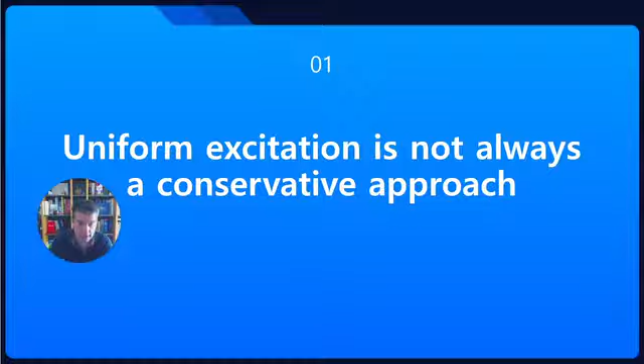Let us start by questioning a fundamental assumption that most of us make in design. There's a wide perception that uniform excitation is always conservative, so if we forget about the spatially variable nature of ground motion across an extended structure, it's going to be fine. This is not necessarily true, as you'll see in this brief webinar, and if it's not true, it means we need to do something. So the first thing we'd like to challenge is whether the common assumption that all support points in your finite element model will be excited with exactly the same time history is conservative or not.

Let's start with the definition that Eurocode 8 gives in the current version, not the new generation, the standard one. Spatial variability is defined as the situation where ground motion at different points differs, and therefore the seismic action cannot be based on the characterization of motion at a single point, typically applied in an identical manner across all support points. So the code recognizes that ground motion is not the same.

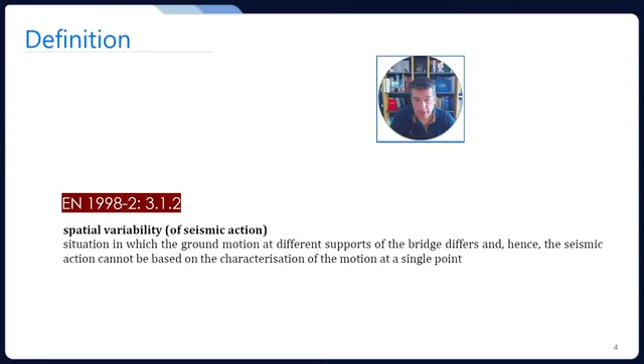If you consider any long structure, a bridge, a buried pipeline, an above ground pipeline, anything extending above 100 meters or so, take this example: there is absolutely no reason for ground motion to be the same from the support of one pylon compared to the support of another pylon. Why? First of all, because waves travel, and as they travel, many things happen.

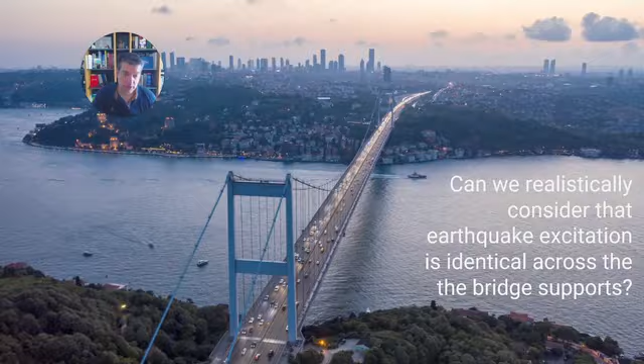Can we realistically consider that earthquake ground motion is just a single text file, identical at all support points? Sometimes in probabilistic assessment we use a bunch of motions, maybe 100 ground motions, and say we've accounted for the uncertainty in the earthquake input. Well, yes, in terms of amplitude, frequency content, duration, and other selection criteria. But we have not accounted at all for the fact that as waves travel across a structure, they do change. This is the very topic we're discussing today.

It's easy to comprehend that waves travel, as you see in this visualization. So at minimum, even if the ground motion were the same, there would be some phase difference, some time delay, before the waves arrive from one point to another. Is this related to the speed of traveling of the waves? Yes, of course—but be careful, not the shear wave velocity, because we're not talking about vertically propagating shear waves right now.

If we have a bedrock and all waves simply travel from the bedrock vertically upwards to the free field, then there would be no phase difference. They would arrive at exactly the same point. But because waves travel at an angle, this means that they have an apparent velocity, which is different than the Vs velocity. It's much larger, yes, but it's definitely different. And therefore, they would arrive at different points at different times.

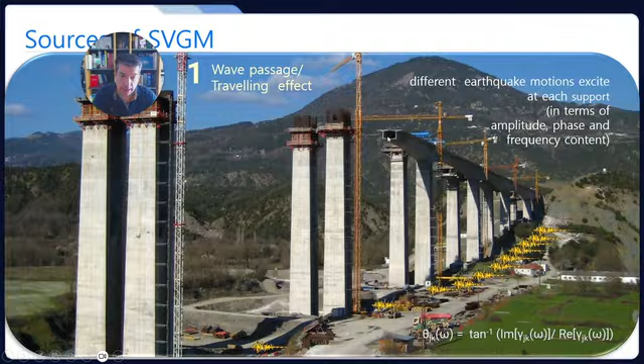So due to wave travel, ground motions not only arrive at a delay, they are different. And because they are different, their coherency drops with frequency and with distance. So the longer two points are apart, the less correlated they are. This is something easy to understand. And the higher the frequency they carry, the quicker the drop of this correlation, which is called coherency.

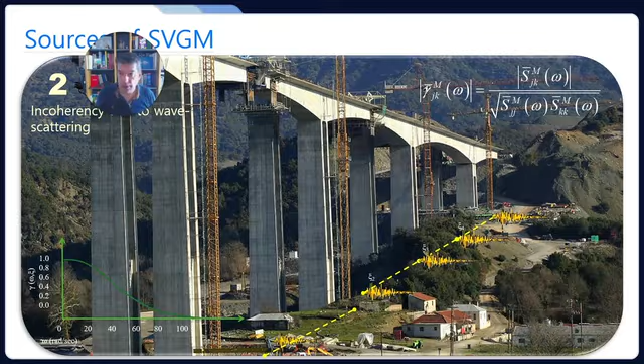This is a general rule, and this rule has been verified in various strong motion arrays across the world, in Taiwan, in Japan, in the West Coast, and in Europe. And that's exactly why different scientists are plotting, like you can see here in this chart, for a given distance, coherency with frequency, starting from unity, which means identical signals, and gradually this coherency drops with increasing frequency. Now, which one of these equations you're going to use, that's subjective, obviously, depends on the seismotectonic environment you're in, but whatever you use, or if you use the average of them, the notion is the same.

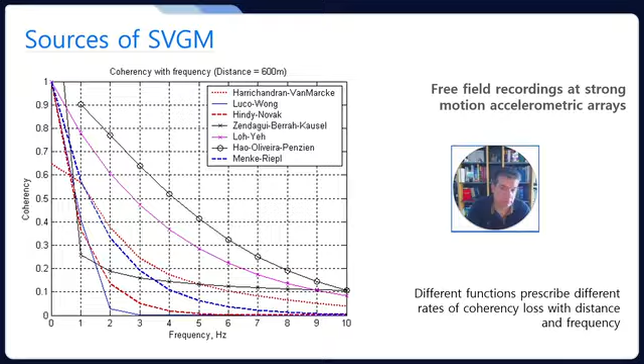Similarity, let's say correlation or coherency, drops with frequency and with distance. This is a fact. So there is no chance ground motions are the same from one point to another. Of course, the million dollar question here would be: okay, maybe points have a different excitation across a bridge, but the response will be conservative. The response of a bridge will be reduced, and the design quantities will be reduced. And if that's the case, we don't have to worry about it. And this would actually be the useless seminar of the day, because we've learned nothing and there is nothing to do about it.

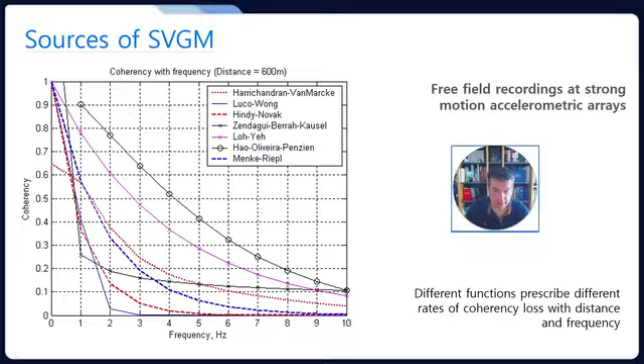So let's put some numbers so that it is more justified. For instance, consider a case where not only waves take time to propagate, not only they are reflected and refracted and changing in phase, amplitude, and frequency content, but you also have very different local soil conditions.

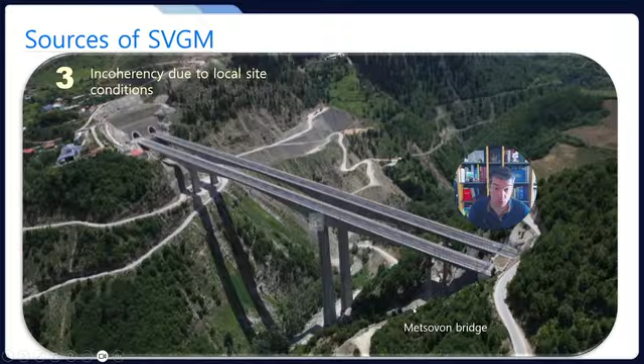That's an additional reason. It's an additional reason, because commonly in bridges that cross valleys, the soil profile is kind of rocky, or soil type A, at the abutments, and then it can become softer as you cross a valley, or even very soft and liquefiable in specific cases, which means that different points will have very different frequency contents and actually amplitudes, because if soil liquefies, there is an acceleration cutoff.

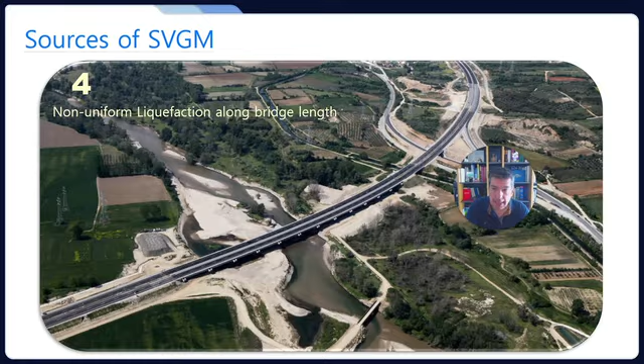So because of these four reasons, ground motions are inevitably different. The structural response will be different. I'm telling you straight off that on some occasions it's going to be increased locally or decreased locally, for reasons that we'll reveal in a while. And this is exactly where the Eurocode is trying to put things in perspective and make suggestions depending on where you're designing your bridge.

A little bit of evidence, because probably just by showing photos, I cannot convince you. Let's take a very regular, I would say even common, ordinary bridge in an area that's not even of high seismicity. This is the Warth Bridge in Austria. It is moderate seismicity in the region, and this is a bridge of 7 spans with a reasonably high length of about 400 meters.

And this is excited by two different scenarios. In one, we've got the same accelerogram at all support points, uniform excitation, synchronous excitation, as you see at the top. In the other case, we've got asynchronous excitation, which means that we did our math — we have a physics-based model for ground motion simulation.

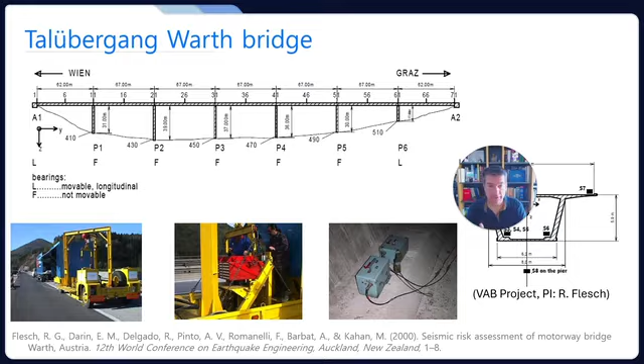We produced how many ground motions we needed here: 2 for the abutments and 6 for the piers. So we generated 8 ground motions that have time delay, local soil conditions, incoherency, and liquefaction—in this case liquefaction does not apply, but overall they're very different.

And we pick one point at the deck, we get the time history, and we plot its Fourier spectrum. You will see that under synchronous excitation, this point is vibrating at various frequencies, which correspond to several modes that are part of the dynamic properties of the bridge.

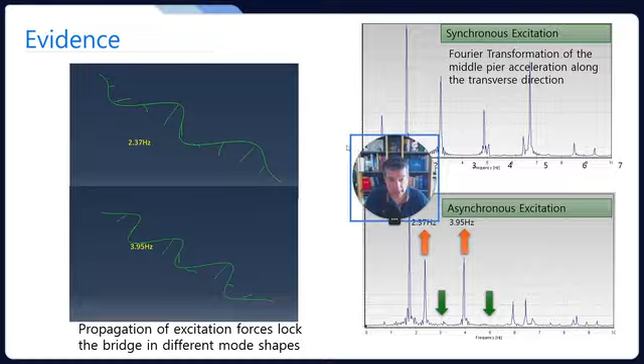But in case of asynchronous excitation, you will notice that there is one specific frequency that the structure, this point, is vibrating on during synchronous excitation. Then during asynchronous excitation, this is diminished, it's 0. And the same happens with another frequency, around 5 Hertz, 0. Whereas this point vibrates at 2 other frequencies, 2.37 and 3.95 Hertz.

If we plot the modes, these are very nice. We call them antisymmetric modes, snake-type modes, which all of a sudden have been triggered.

So, lesson learned number 1: when we excite a structure with a realistic asynchronous ground motion scenario, the structure will also vibrate on some modes whose participation factor was very small if we run analysis with a common uniform assumption. But during asynchronous excitation, they will pop up, they will wake up some frequencies, antisymmetric modes that could not be seen numerically.

And because synchronous excitation is something fictitious, it does not exist in the world, whereas asynchronous excitation exists in the world, this is very good evidence that we are missing something very important: the contribution and the excitation of antisymmetric higher modes. So that's a very hard lesson learned straight off about something that was in the shadows, suppressed, because we never had the data to run bridges for realistic measured scenarios of ground motion.

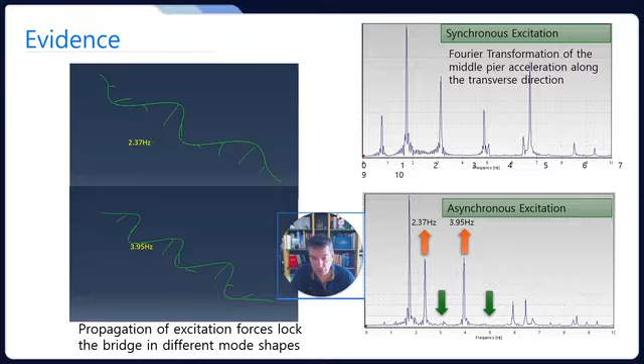And if you don't really believe me about this, let me show you this little video here. So you see the same bridge. This is the response of the bridge from the top under synchronous excitation, and the response of the bridge at the bottom under asynchronous excitation.

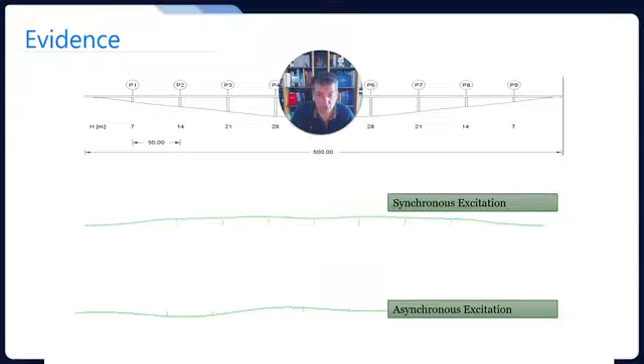You see that as time passes, under uniform excitation, the bridge tends to vibrate out of plane. Okay, that's very visible. Whereas under asynchronous excitation, the bridge aims to do a snake-type antisymmetric mode. So the frequencies that I just told you about that were revealed by a fast Fourier transformation are even visible by the naked eye. The response of the bridge out of these two scenarios is very different.

The one is what we normally do. The second one is more realistic because it is based on all the features of asynchronous excitation as we discussed. So this is fundamental. This is recognized.

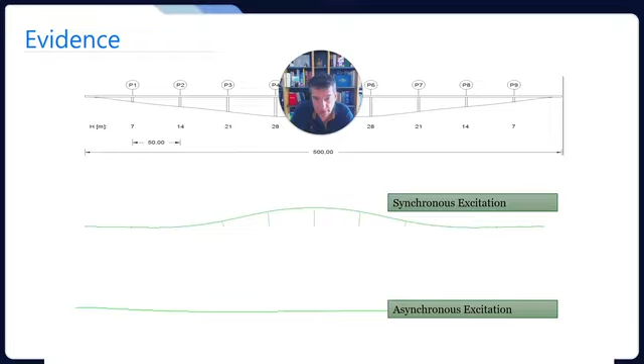You will probably ask me here, well Tassos, if this was known and if this was so important, why is this not in the codes? Well, the reason it is not in the codes is because this is a phenomenon which is quite case dependent. It is difficult to ask engineers to generate ground motions that represent all the physics of wave propagation in a complex source medium. And I think most of the codes are practically avoiding phenomena that are associated with high uncertainty because there is nothing they can actually do to reduce this uncertainty.

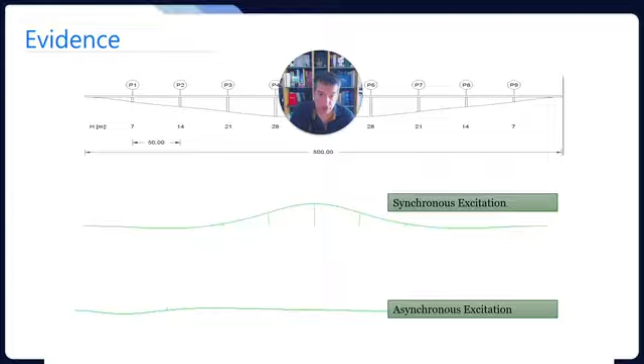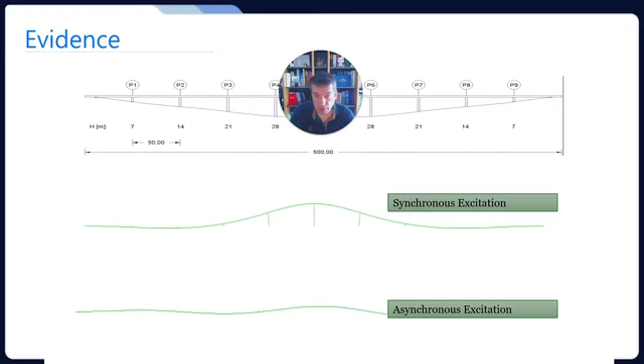And they avoid opening Pandora's box of something that will give very different results depending on your assumptions. It is so much easier simply to apply a safety factor or just close the eyes and move on. So no blame to the code—that's a complex problem. The only reason that in the new version of the Eurocode there are some specific conditions and advice on how to deal with it is because there are some concrete results about what's going on and what's the simplest way we can take it into account.

So this explains why the problem is important and why it has been neglected in previous versions of the code. Another example: Chalkida Bridge. This is connecting the island of Evia with the Greek mainland. It's a 700 meter bridge, cable stayed, with a central deck of about 400 meters. So basically we can consider two piers here.

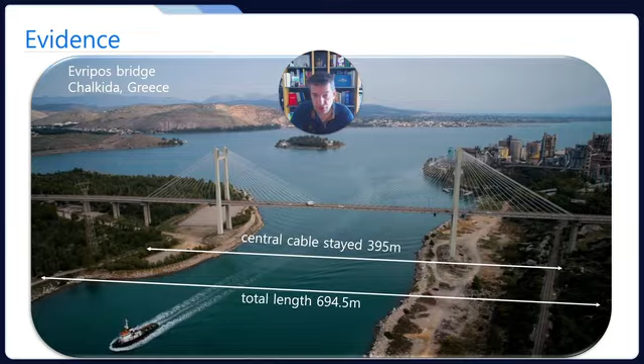This bridge is permanently instrumented. And during the 1999 earthquake in Athens, there were measurements on the bridge, at the base of the bridge, and in the near field. So what we actually now call asynchronous excitation was measured, and the bridge response under asynchronous excitation was also measured. Therefore, it was a very good exercise, which you can find in the relevant paper, to compare it with the assumption that we normally make of uniform excitation.

In this case, the asynchronous excitation is what we have practically, data from an actual earthquake through permanent instrumentation. The synchronous excitation is a numerical scenario.

We just pick one of the excitations at the abutment and apply it throughout the structure in a uniform sense. Then we select one point, for example this point at the deck, instrumented by sensor 5T. Through this point, we take the fast Fourier transform again, but plot it versus frequency and time.

This is a plot in the frequency-time space to see how this point is vibrating in time across several frequencies. In the synchronous excitation scenario, which is purely numerical, only the ground motion at the abutment is actually accurate. The assumption of synchronous excitation does not exist in practice, so this synchronous case is purely numerical.

We can see specific frequencies where the energy of vibration is concentrated, pretty much 2 Hz and 6 Hz. The asynchronous excitation scenario, which is effectively what we measured, has an extra mode. The structure is vibrating at 4.34 Hz. If we look at the modes, this is another antisymmetric mode.

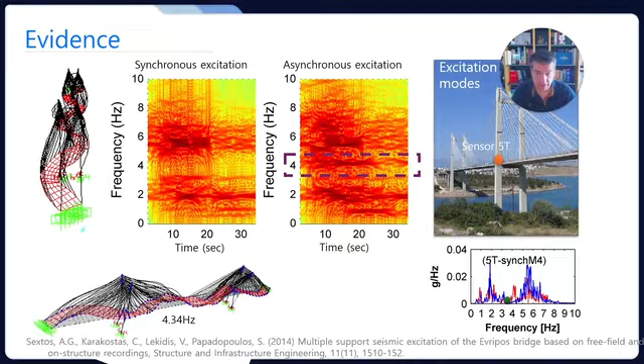So this is evidence from measured data in a real bridge under a real earthquake. And that's something the code now takes into consideration, not only as evidence but also as part of the solution. We'll come back to this in our next topic.

If you have time and would like to see an additional implication in terms of cost and loss, you will find out more, but in the interest of time, I'll just give you the quick answer about what this is all about.

If you compare the difference in the estimate of loss for a bridge under synchronous and asynchronous excitation, you will see that not only is the response very different, but the damage is very different. And because the damage is different, the repair cost is different, and the loss is different.

Therefore, the whole assessment we would do for different directions of ground motion, around 360 degrees, and different propagation patterns of asynchronism, would have a great impact on loss, particularly for bridges that have a strange shape, like this Krystallopigi bridge, which is at the border between Greece and Albania.

It's a curved bridge. It is difficult to accommodate the complex motion of asynchronous excitation, and the damage pattern, if you increase the acceleration beyond the design level, can be very, very different.

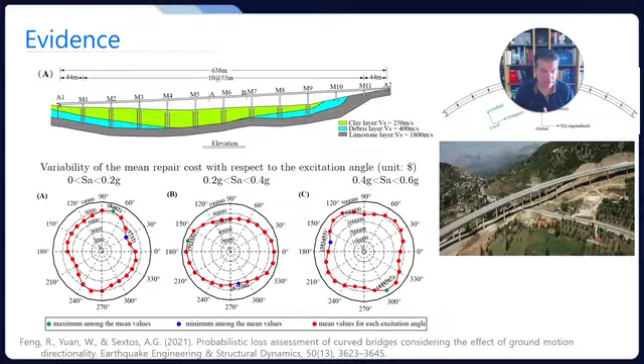So with all this evidence, I'm hoping I've convinced you at least a little bit that this is an important topic. Now let's see what the code is prescribing today, and what the new generation of the Eurocode is prescribing for the years to come.

First, let me say that the US and Japanese codes do not treat spatial variability as a problem per se. They recognize that it exists, they think it is complex, and they don't touch it. Practically, they only offer for bridge design larger seating lengths.

The idea is: probably there will be differential motion between different points, so it's better to increase the seating length of a simply supported deck if you have one. That's one way to deal with it, but obviously simply supported decks do not exist very frequently for long bridges anymore.

Therefore, if we consider that the connection is monolithic, or there is a bearing, there is some degree of connection between the deck and the pier, the more we abstract and disturb the bridge with asynchronous excitation, the more different the response will be, no matter how much we want to simplify it.

So anyway, back to the Eurocode, which is taking a good step ahead. In the current version of the code, there are good news and bad news. The good news is that it recognizes the problem exists, even in the code we're using right now, the one issued in 2005. It also offers a simplified approach, which we'll come to in a moment.

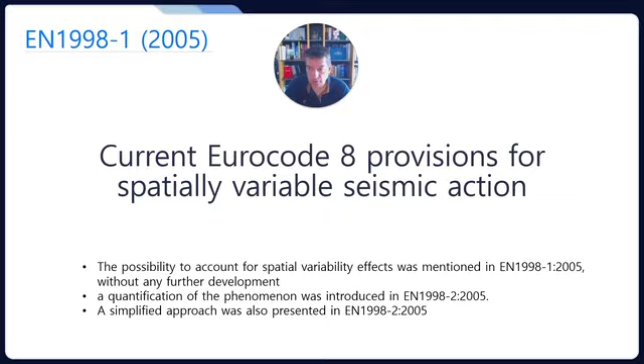You should also forget about spatial variability if your bridge rests on soils at every support that do not change by more than one category. To give the opposite example, if your bridge rests at the abutments on soil A, and the next pier is soil B, and the next pier is soil C, you've changed two soil classes, so you cannot escape it - you do have to account for spatial variability. It's a very simple rule, actually.

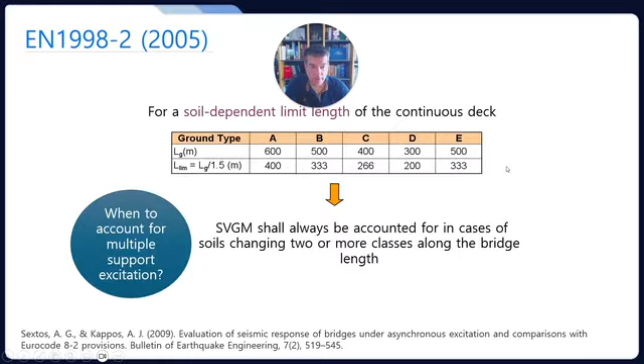And then the code goes one step further and suggests something - probably in your career you've already tried this, so I'll be preaching to the choir in a sense, but I'm sure you've found out what this actually means. For those who aren't familiar, let me explain what the current Eurocode 8 Part 2 prescribes for spatial variability.

Let's assume you've got a bridge. You run your time history analysis or response spectrum analysis in the most common scenario. If your bridge is longer than these limits, you should do two additional excitations with a static profile of imposed displacements. The code gives you simple formulae to calculate this ground displacement, dg, which is a function of the spectrum and the design acceleration, and it also relates to the length of each span.

It advises the user to create, in any finite element code like MIDAS or whatever software you're using, a set of imposed static displacements. The abutment starts with zero displacement, the next pier has the next displacement calculated by this expression, the following pier an increased displacement, and so on. This is a linear kind of excitation that looks like this when imposed, and it has a cap because it cannot exceed an upper bound - so it looks like the deformed shape you see here. This will be called displacement set A.

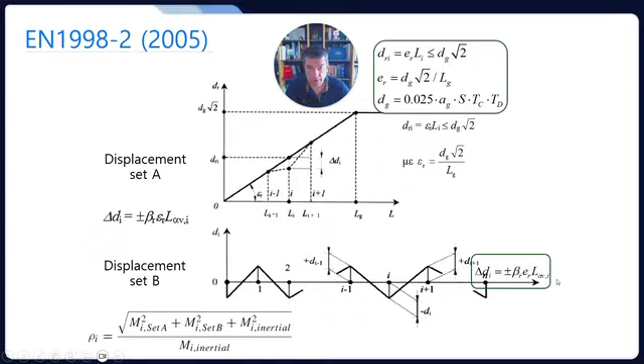Then you should repeat the exercise by imposing unit displacements multiplied by the standard displacement provided in the code, but in an alternate sign - plus minus, plus minus, plus minus, between abutments, first pier, second pier, ninth pier, and final abutment. This gives a displacement profile of this form.

Inevitably, if you impose these deformations, the structure will develop some stresses. So if you've calculated bending moments from your inertial response spectrum analysis, plus bending moments from the first set and from the other set, you can easily take the square root of the sum of the squares and increase your design quantities. It's very simple.

Now let's think a little about whether this is accurate and meaningful. Problem number one: this is a static excitation, the scenario of imposing static deformations. For the previous 25 minutes I've been arguing that the main feature of spatial variability is that it dynamically triggers modes that don't participate under uniform excitation. It's impossible to capture these modes with a static displacement, because it doesn't account for the degree of dynamic triggering of each mode. So by definition, it's a static approach - it will not work.

If you've tried this method over the years and compared SRSS results with your initial design quantities from response spectrum analysis, you'll see that this amplification ratio rho is only about a 2%, 3%, maybe 5% maximum increase somewhere in your structure. First, this increase doesn't really mimic the antisymmetric modes, and second, it's a very marginal, small increase. I believe the code drafters at the time knew this method was oversimplified, so it would be too much to lead to increases like 20, 30, 40%. They did well by providing a method that didn't change the results that much.

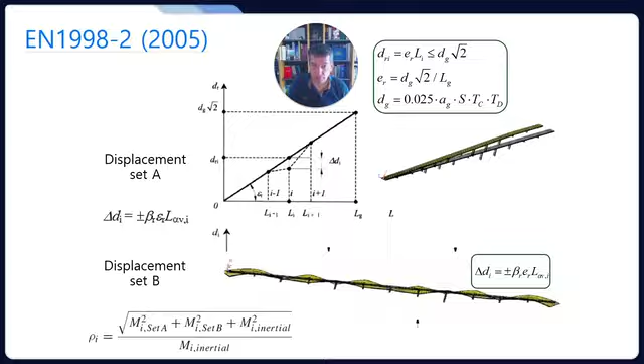In fairness, even though I've published my own reservations about the physics of this approach, at least they did something and proposed a solution recognizing the problem. It wasn't very accurate, but it was the first step to raise awareness about asynchronous excitation. This is still what's normally done today.

To be fair, the current version of the code, in its Annex D, which is informative, provides a way more accurate method. It was proposed by Professor Der Kiureghian and Neuenhofer in the 90s. This is a much more rigorous approach. I'm very much in favor of it, but the problem is you can mostly use it in the frequency domain, which is quite complicated for an ordinary engineer. So it's in an informative annex, and I doubt people have actually used it.

It was always easier to call somebody who does this job to help generate the samples of motion for a very extended structure. That being said, the current version of the code is already way ahead compared to the Japanese and US codes, and it goes even further in the new version.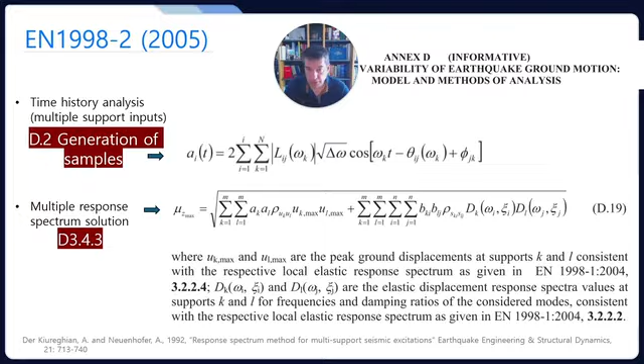So what is the new generation of Eurocode 8 proposing for spatially variable earthquake ground motions? First, it proposes a table - a magic table that I personally like a lot because it's like a playbook, and you'll see what I mean in a while.

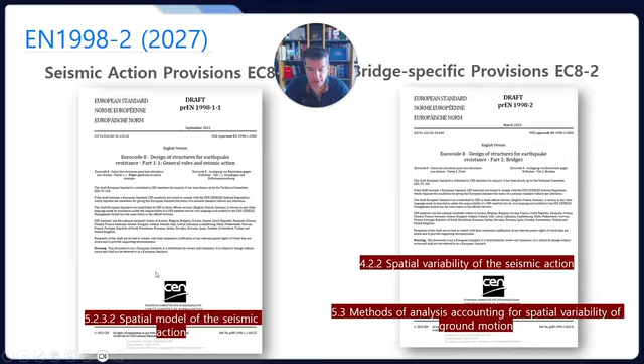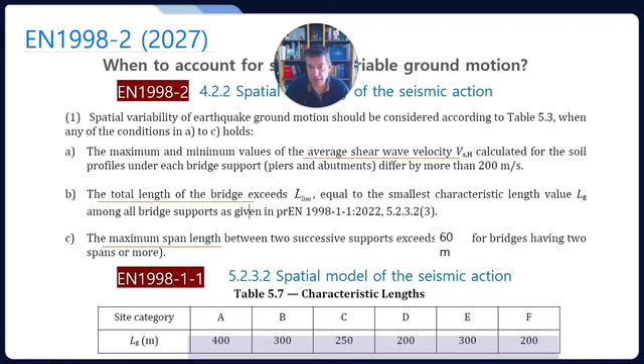If you go to Eurocode 8 Part 1, since the new Part 1 is split into two parts, and Eurocode 8 Part 2 for bridges in the relevant clauses, you'll see there's this characteristic length beyond which you should account for ground motion variability. It's not asking you to count how many soil classes you're switching from A to B to C to D. It's just asking you to check whether the average shear wave velocity differs by more than 200 meters per second point to point, which is easier and more accurate. But so far, it follows the previous version of the code.

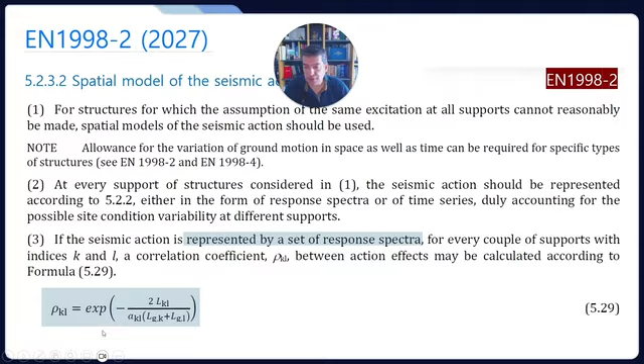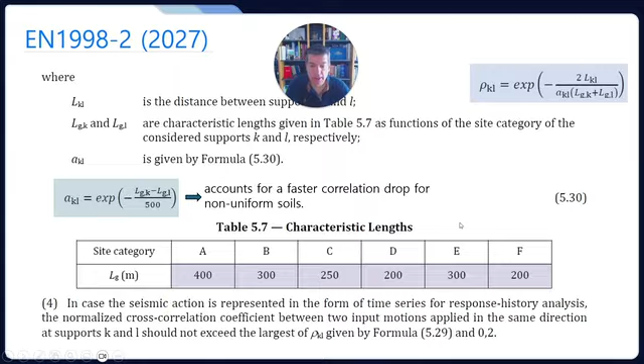It's also offering a correlation factor you can use for generating different response spectra at every couple of supports. This is pretty much how you use it - it's a method proposed by Professor Pierre Labbe, and it works quite well. Depending on the distance between different points and an exponential factor that drops faster for non-uniform soils, it gives you spectra that are more different from one point to another the longer the distance is, and the softer and more non-linear the soils are, to put it simply. This is a meaningful, simple solution you can use.

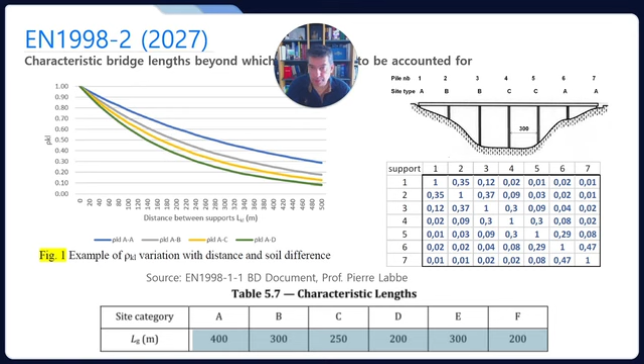Then the code offers this magic table I mentioned, which starts from some scenarios and asks you three things: what is your bridge's total length, what is your bridge's maximum span length, and what about your soil conditions?

If your bridge is longer than the characteristic lengths, or if it is not longer but you do have a long span, more than 60 meters, then you can use a simplified approach given in the code. I'm going to present this method in the following slides. It's quite simple to use, and it's based on the excitation of antisymmetric modes.

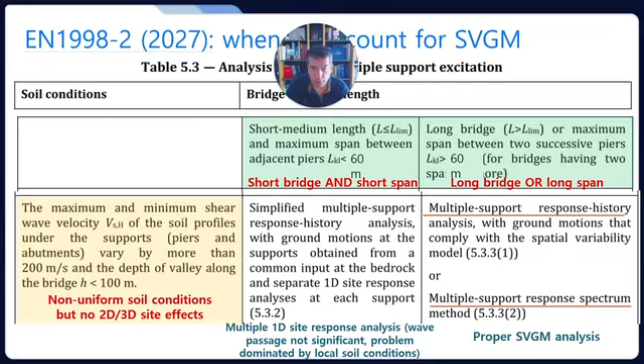And of course, if you don't like what I just said—in the first case you can just do nothing and increase design quantities by 20%. If you're in the second case, long bridge or long span, you can forget about calling your friend and increase everything by 30%. When I say everything, I mean displacements and accelerations, or essentially bending moments and shear forces in your piers, increased by 30%.

If you think that's too much, no problem—again, you call your friend and they'll give you a set of ground motions. You'll apply 7 pairs minimum as the code prescribes, but with motions that are non-uniform, you get whatever average you get, and the job is done. So you have these options.

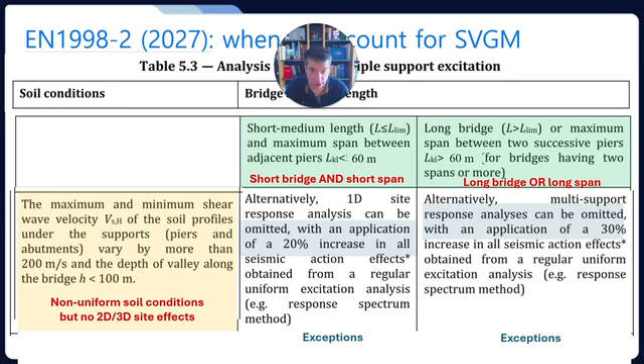On the other hand, if you're dealing with a complex bridge with non-uniform soil and a very strange topography with 2D and 3D site effects, you can't really escape it. You need to model the whole thing as you would in a very expensive bridge design. Or, if you don't want to do that, you do standard analysis but increase your design quantities by 30%.

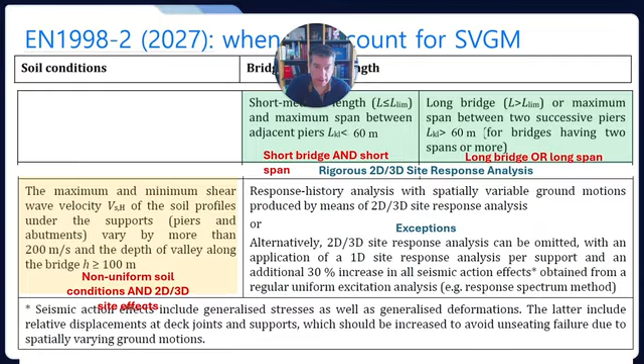So this is the table where you can navigate. If you want, you can skip all calculations and just apply an amplification factor—by 20%—if you're not even in the case of having to apply all this because you have a short bridge, short span. In all other cases, you've got several methods to pick from, some of which most design offices can handle, and if things require a very complex analysis, you'll need a consultant to help. It's a very handy table, based on a simplified solution that I'll present briefly in the last 10 minutes of this seminar.

Bear in mind, this is only for uniform soils that vary less than 200 meters per second between the point of lowest Vs to the point of highest Vs. In these cases you can use this method.

This method, just to give you a heads up, is not solving the problem, it is hacking the problem. In what sense? It is not generating ground motions, because the problem is so multi-parametric and complex that with 7 pairs of ground motions it is impossible to capture all salient features of asynchronous excitation. Impossible. But it is dealing reversely, only with the response.

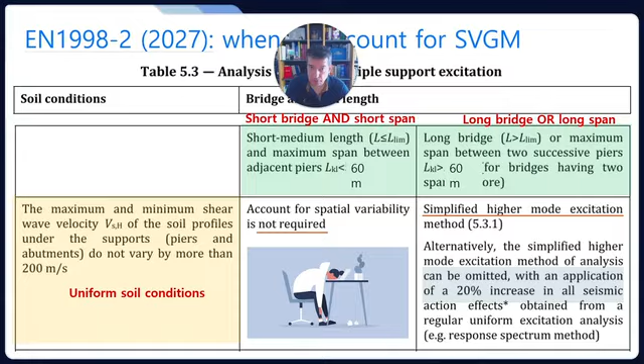And the idea is actually very simple. It says, I don't know if spatial variability will be important for your structure, but I assume already, based on this table, that you're already having a long bridge or a long span. So 90% it is important. And we know from the literature that if asynchronous excitation is important, 80% of the time it's going to trigger higher modes. So instead of generating ground motion scenarios and giving you 100 motions to run and do probabilistic assessment, trying to capture things that are really out of your hands, let us assume that asynchronous excitation has indeed triggered antisymmetric modes. What does this mean?

That the elements, the structural members that are associated with the shape of the first and second antisymmetric mode, will have their design quantities amplified because of the activation of these antisymmetric modes. And if that's the case, I'm going to give you a simple formula where you amplify the design quantities of specific structural members, not all your members throughout, only the ones that vibrate like this in the antisymmetric mode.

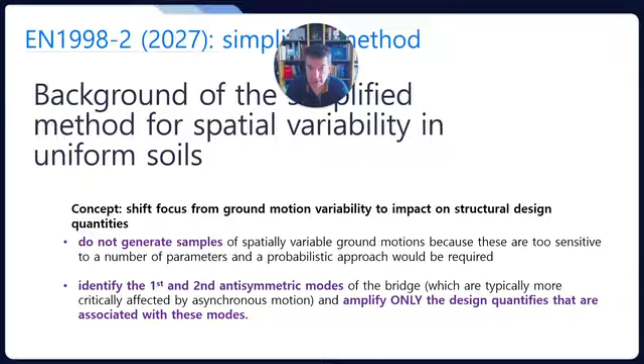And this is really very important because it matches the fundamental observation that asynchronous excitation may be beneficial on average, because the structure cannot vibrate at its fundamental mode, as we said, but locally it's going to be critical. And this local amplification will be captured by this simple method.

To cut the long story short, I'm going to give you very briefly the theory as a background, because the code is actually suggesting 2 very simple steps, but just to understand where it's coming from. It's coming from this work that we've done with a former student of mine.

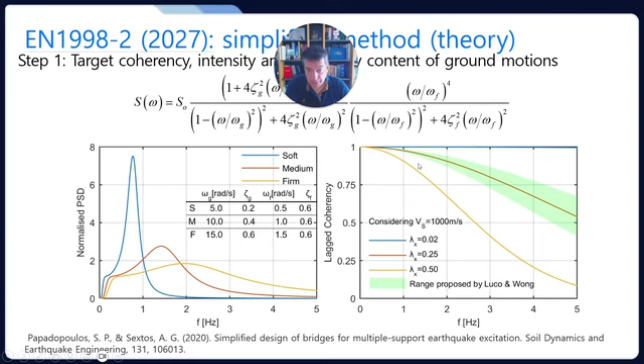And essentially it means, well, before you start designing your bridge, you know your target coherency. You can use a Kanai-Tajimi spectrum with parameters depending on soft, medium, or firm soil, or you can have a response spectrum, which is a design spectrum in our case. You also have to pick a coherency loss function, anyone that matches your preferences from the literature, or the mean of them, or whatever you really want.

This is your input. And then you simply run modal analysis for your bridge. Most probably you've already run it before you did your response spectrum analysis anyway. And you take a look at the first antisymmetric mode and the second antisymmetric mode, because this is the mode you're going to use to amplify the response of specific components.

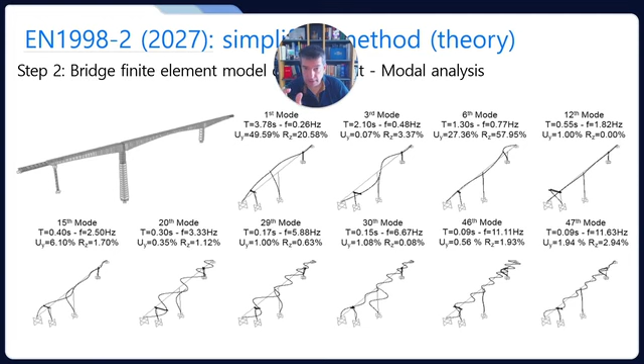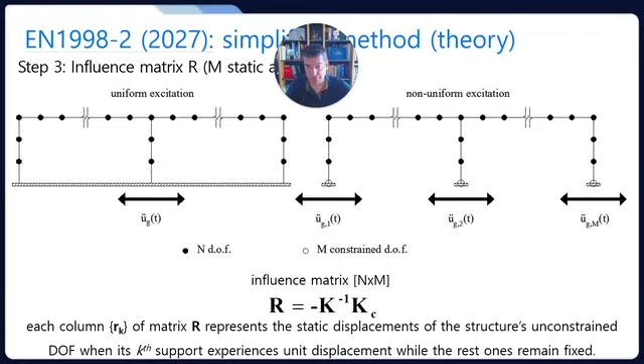And then, again, that's the theory, I'm not getting too much into it. Of course, there is what is called an influence matrix, which means that if in a bridge I impose a unit displacement in one support, I develop stresses in all unconstrained degrees of freedom. And if I move another support, I develop other stresses somewhere else in the structure. And if I move another point, I develop other stresses and displacements in other degrees of freedom, and so on. So all combined, they form a matrix.

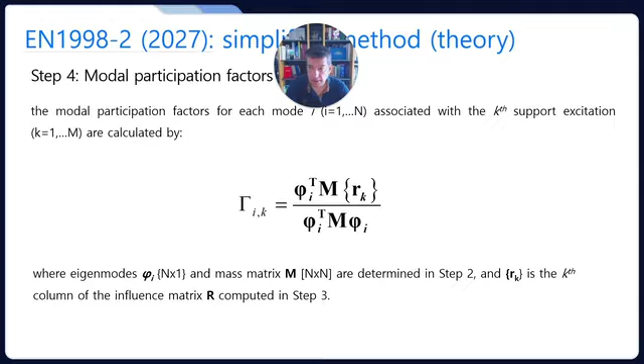And then I have the modal participation factors, which, depending on the nature of asynchronism of the ground motion, are going to be increased or decreased dynamically in the system. And then there is what is called the non-dimensional spatial variability parameter psi as a function of frequency omega. So ground motion at the supports are described in the frequency domain as a function of the reference one, to show how much things are changing.

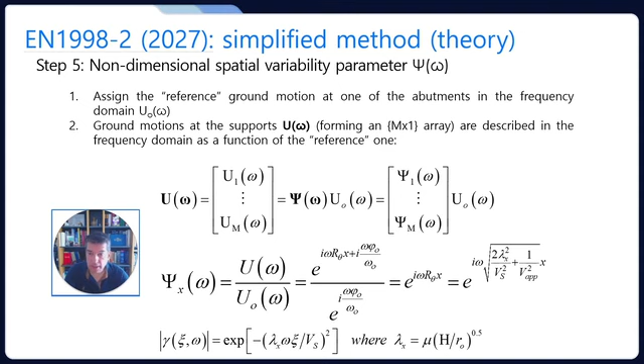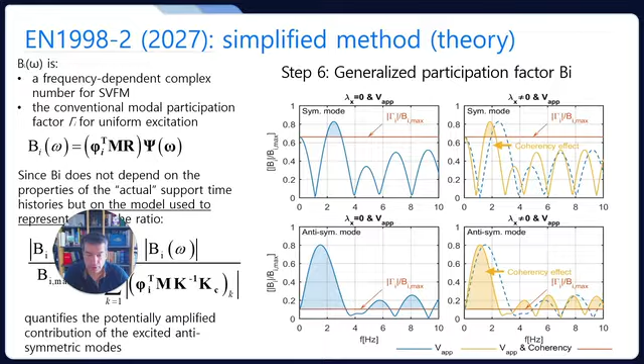And after we do this, we practically calculate the scale in which every antisymmetric mode is excited. You can see here how much different frequencies are amplified, if you like, in different ways, depending on the ground motion. And having done all that, which of course, like I said, is the theory, so I'm just going to skip it, you end up with a scaling factor. So pretty much you apply an amplification of specific mode influence across the dynamic response of your structure.

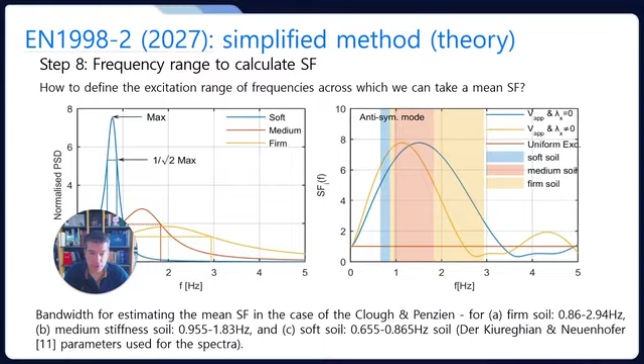But because this is, of course, too complex to do in a real design case, the code is offering something very, very simple. It says you run, in step 1, your modal analysis, and then you apply 2 static cases. Remember the static cases of the current version of the code, but in this case, these are inspired by the shape of the antisymmetric modes, which is a dynamic phenomenon.

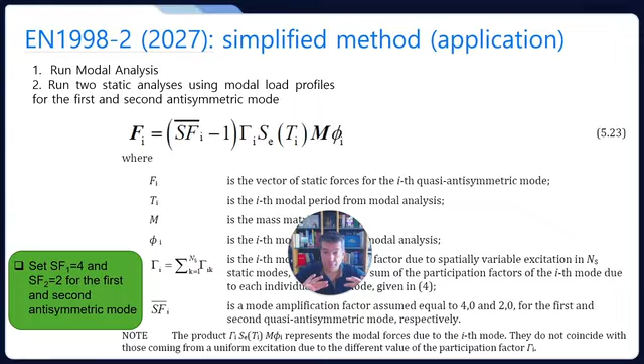Apart from applying these static profiles with the shape of the forces of the antisymmetric modes, the first and the second, you amplify them by a fixed scaling factor of 4 and 2. These are numbers we have found after thousands of analyses that are quite realistic. By doing so, you push your structure with a profile of forces and get some design quantities, then simply do SRSS between the conventional bending moments or shear forces from your response analysis and this simple amplification profile. You superimpose, and most of your components will end up with the same bending moments, but those associated with the shape of the antisymmetric mode will have an amplification depending on a number of factors.

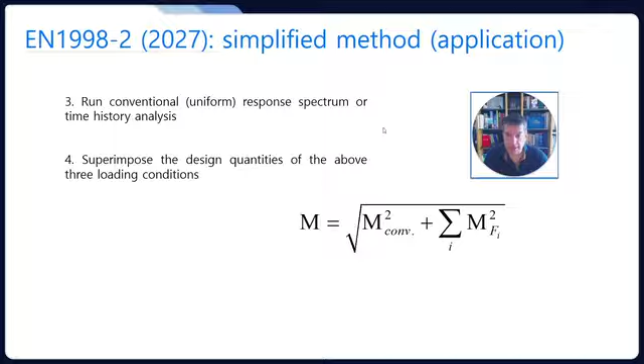This is very easy to do, and it's interesting to see a couple of case studies to check whether it is working well or not.

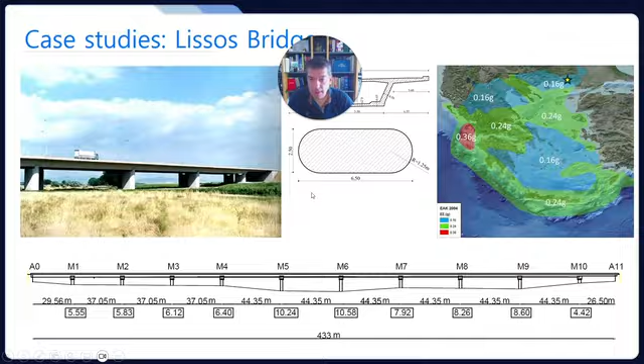So let's take two characteristic bridges. One is the Lissos bridge, a seismically isolated structure in Greece, in the area of Thrace with the lowest seismicity in Greece, 0.16, pretty much like moderate seismicity in Central Europe. This is excited by a number of ground motions, accelerations or displacements, using whatever finite element model software you want.

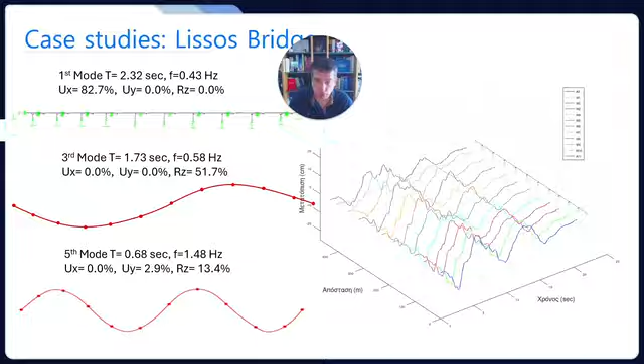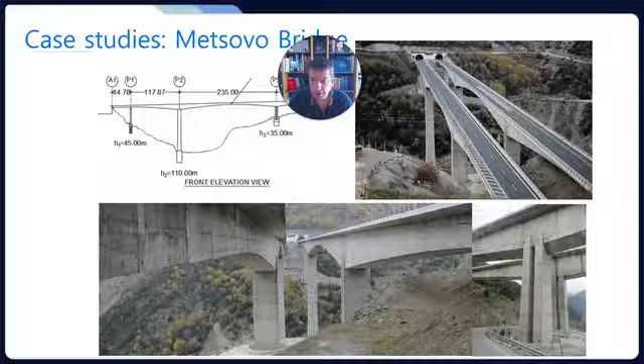We're going to compare the rigorous analysis, calculating a sample of ground motions used as spatially variable earthquake input, with the simplified Eurocode expression to see how close we are. Similarly for the Metsovo bridge, a very important bridge in northern Greece with three pylons and two abutments, a very challenging bridge for construction in a highly mountainous area, in the Epirus region. Again, rigorous analysis with motions that change in space and time are compared with a simplified version.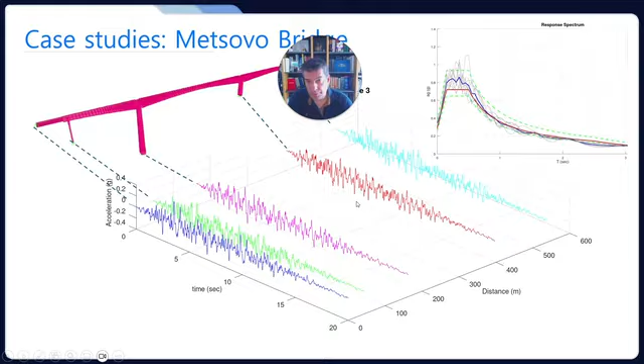So that's my last slide. By the rigorous analysis on the left, we've got the Lissos bridge, the seismically isolated one, that's why it has 10 piers. On the right, we've got the Metsovo bridge with 2 piers and 2 abutments.

The blue one is the mean of the rigorous assessment with physics-based simulation of ground motion and analysis in the time domain. The orange one is the very simple prediction with a simple amplification of the higher modes. You see that not only is the simplified prediction within the mean plus minus one standard deviation, but it's also capturing well that for some piers, those associated with the antisymmetric mode, the response is more than 1 compared to the uniform case, whereas on other piers the response is reduced and the effect is beneficial.

By applying this method, statistically you get a good estimate of those piers more sensitive to spatial variability. Evidently, the simplified method using SRSS on the design quantities from response spectrum analysis can never be less than 1 compared to the response spectrum analysis. That's why the orange one always has a lower bound of 1, whereas if you run a rigorous analysis you can see a benefit of 10% reduction for example. You won't get this with the simplified version, but that's fine because a simplified method should never give you less than your response spectrum method.

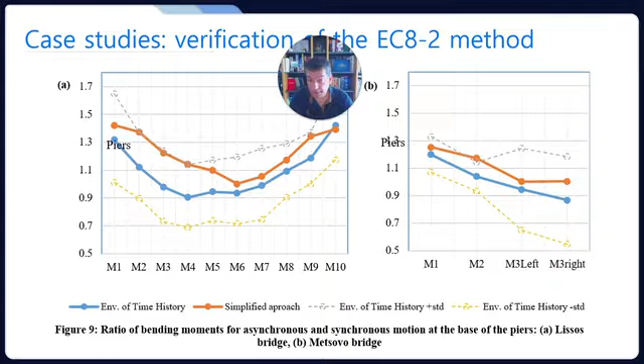So with that, I have concluded this presentation. I hope I gave you an idea not only about what the code is prescribing, but also how easy it is to use your finite element model to account for a very complicated problem that would be very hard for someone not dealing with this aspect of earthquake engineering to account for in ordinary design processes. I think Eurocode 8 is taking a significant step forward ahead of all other codes worldwide, and I hope you will not be discouraged from implementing some of the guidance provided in Eurocode 8 for designing long bridges for asynchronous excitation.